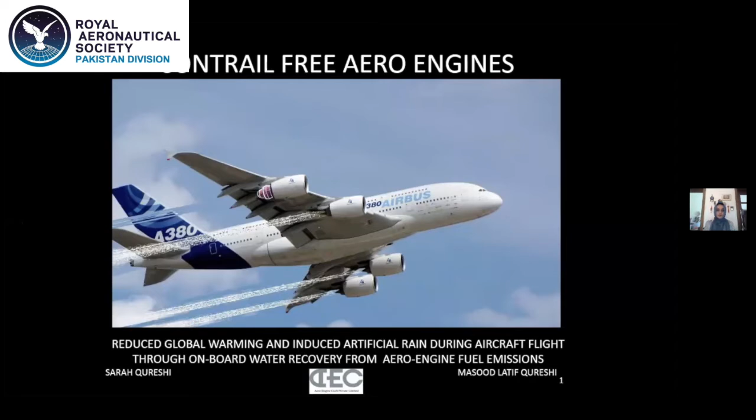We would be talking about contrails. Contrails is the most abundant non-carbon emission in the sky. On ground, when we talk about global warming and fuel burn, there is one major contributor to global warming, which is carbon dioxide, because the byproducts of any fuel consumption are carbon dioxide and water vapor. But on the ground, because you are at 1 atmosphere pressure, this water vapor recycles into liquid water and does not behave as a greenhouse gas. But when you are at a cruise altitude of 10,000 meters, the water vapor is just in the molecular form, and it is a greenhouse gas just as carbon dioxide is.

So this issue is very critical because number one, it is happening in the sky. It is not very visible as other components of pollution are visible on the ground. Number two, the sole contributor to this pollution in the sky due to non-carbon emissions is the aviation industry, and this is a very specialized industry, and you require a lot of technical expertise. It's very tech intensive to deal with this problem. So when we talk about emissions, we have to deal with 2 kinds of emissions.

So contrail is basically the frozen component of water vapor that is released during hydrocarbon fuel burn in the air. And this is something that we have all witnessed when we fly, that the aircraft releases these white thin clouds, which are contrails. So we have developed a technology to mitigate this, which is called the contrail-free aero engine. The contrail-free aero engine is like an integrated turbo machinery which is attached to the engine at the end, and which processes the emissions of the engine and converts the water vapor component into liquid water, retains it on the aircraft, and releases a cleaner exhaust in the atmosphere.

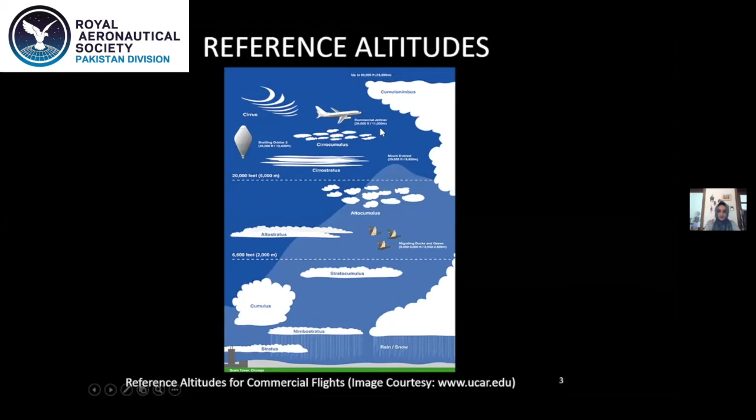And when we are cruising at an altitude of around 11,000 meters, we are even above Mount Everest. So at these ambient conditions of around 218 Kelvin temperature and a quarter of a bar atmosphere, there is no way that the water vapor can automatically recycle itself into liquid water. So this is a problem and it needs to be addressed.

So one of our contributions is that we have developed a turbo machinery. It's an invention by Sir Masood Qureshi. It is an attachment to an existing aircraft engine that can process the combustion gases, sift out the water vapor content as liquid water and store it on the aircraft. And then when you are flying lower down in the atmosphere, closer to the ground, before landing, you can release it as water vapor or rainfall.

So this work was given to me as a research question during my PhD, and since it had a lot of commercial promise and global impact, the university was very keen that this should be taken forward. So after my PhD, I came back to Pakistan and I set up Pakistan's first commercial engine and aircraft R&D company with my co-founder Masood Latif Qureshi. With this company, we are working on sustainable aviation and pro-environment aircraft engines, and on addressing sustainable development goals, the global goals of climate change, water scarcity, innovation.

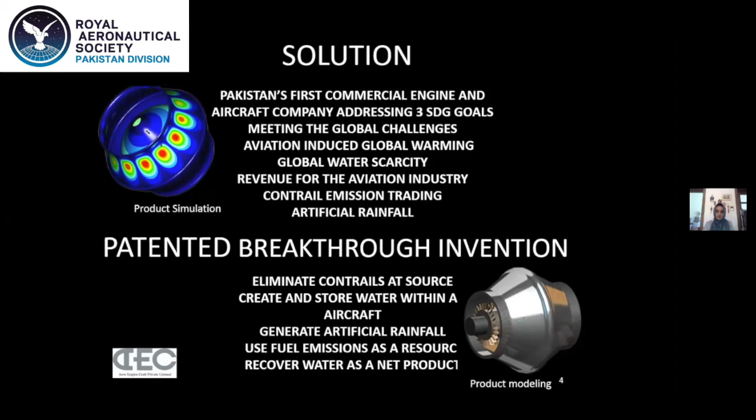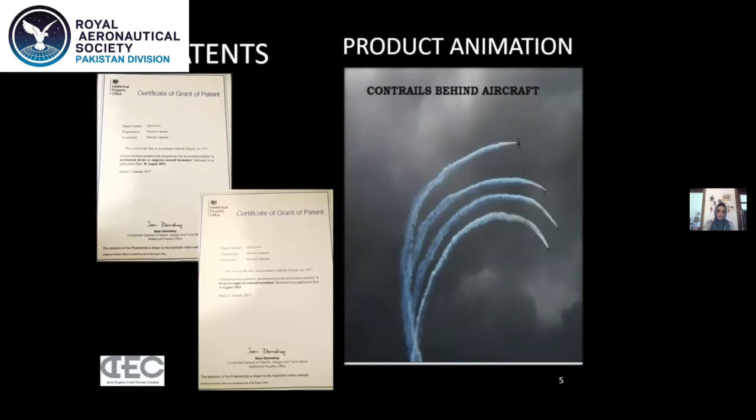Okay, these are the two technology patents that were granted within 15 months for this technology. And these are the milestones that we have achieved. As I mentioned, this was a problem stated during my PhD in 2012. And we moved through the invention and the scientific validation, through atmospheric physics, thermochemistry, mathematical modeling, and then the engineering model was developed. After that, the aircraft performance and engine performance analysis was simulated and carried out to analyze its impact.

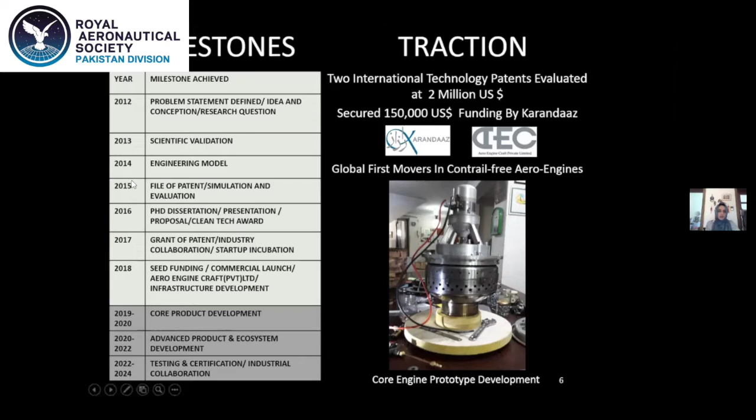And the patents were filed. So in 2016, I submitted my PhD on this, and this was initially done on the A380 because the A380 was the popular aircraft at that time, and it was the largest. The baseline specs were the Trent 900 series because the A380 engine was the largest engine at that time, and if you can verify or validate a model on a large scale, it is easier to scale down. So that was also one of the objectives of using the A380 baseline specs. In 2017, the patent was granted, and we launched our startup. We secured a modest amount of seed funding on equity sharing.

And started the core product development. So at present we have, alhamdulillah, completed the core product development. It is under the testing phase. Obviously there has been a delay because of COVID, but inshallah we would be moving on to the next phase soon. And then we hope that we would be developing the same product on a large scale, on a commercial transport engine scale, and then testing and getting it certified.

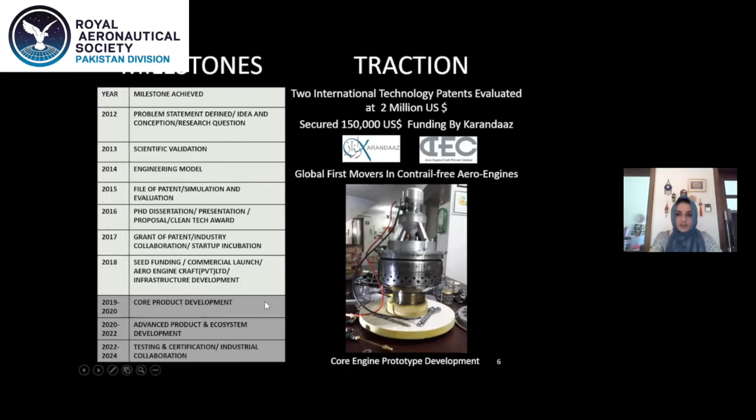So our patents are valued at US$2 million, and we can very proudly call ourselves global first movers in contrail-free aero engine design in the world. So this is basically just to explain where we stand in terms of technology.

All technology that has to get airborne is rated on the basis of NASA's technology readiness level. This is a very popular standard. It starts from 1, which is just a concept. At 2, you develop a mathematical model. At 3, you carry out simulations. Then you do component prototype testing in the lab, then system testing in the lab, then testing in air and flying missions, and then you are ready for a commercial launch at TRL9.

So TRL1 to TRL3 is usually what PhD research is all about, and this is what I covered during my PhD. When we launched our company, we started at TRL4. We decided to develop a proof of concept small scale model, a 1 kilonewton baseline thrust jet engine, integrated with the turbomachinery, that could later be scaled up.

So we started making components. Every component was individually tested for the jet engine, the assembly of the jet engine was tested, and then the turbomachinery for the contrail-free device was developed, and we tested one version. Some issues were highlighted, and now we have developed a second version that is inshallah going to be tested soon. So at present we are at TRL6.

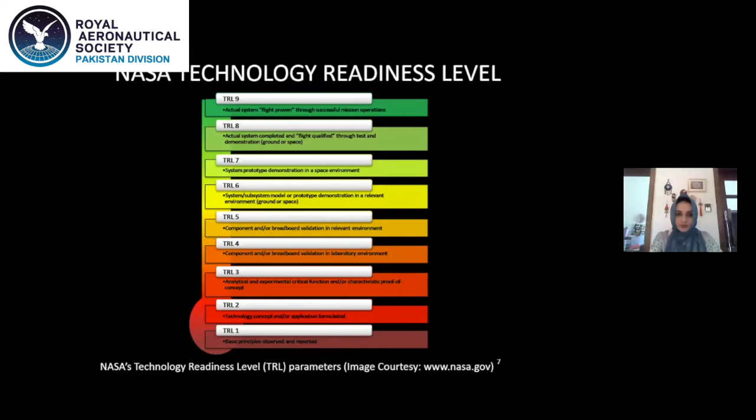So I'm going to give you some business perspective first, and then a bit of a technical concept perspective. The aerospace R&D industry is just like any other R&D industry. It is very technology intensive, and the way we budget ourselves is that almost 40% of our budget goes into equipment, machinery and materials. The remaining 40% goes into human resource, because human resource is very specialized, and overheads are the remaining 20%.

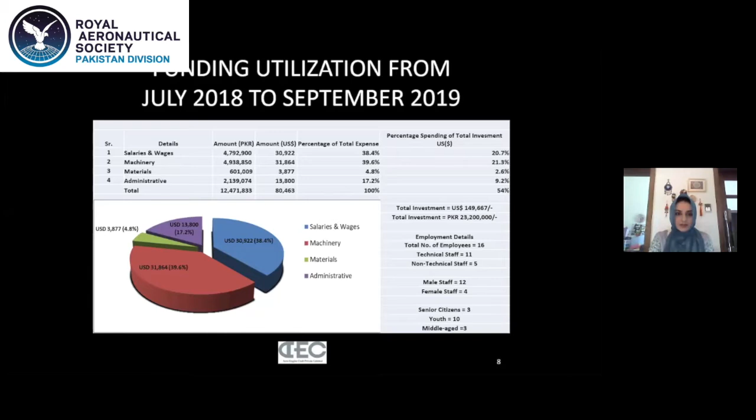Talking about the market, we all know that commercial aerospace is very monopolized and very controlled. There are only three manufacturers of commercial transport engines: Rolls-Royce, GE Aviation, and Pratt and Whitney. Rolls-Royce has 25% of the market share. GE has 55%. There are around 55,000 commercial long-haul flight engines in service, and the pre-COVID growth rate was 3.4%. So this is our primary market where we aim to sell this product.

Our secondary market is the airframe manufacturers, because the contrail-free aero engine would need to be integrated with the airframe for the storage of the water that is created. So the secondary market is Boeing and Airbus, and pre-COVID we had around 25,000 commercial transport aircraft flying in the air.

Then we have other stakeholders as well, the environmental agencies: the Intergovernmental Panel on Climate Change, the United Nations Framework Convention on Climate Change, ICAO, EASA, and we have COP26 coming up. Unfortunately, this is a responsibility that the entire aviation industry holds. Because this contribution to global warming in the sky is not very visible, and it's so specialized, the rest of the world is not addressing it. The aviation industry itself needs to address it, and make sure it is included in the agenda of the international climate change bodies for mitigating global warming and climate change.

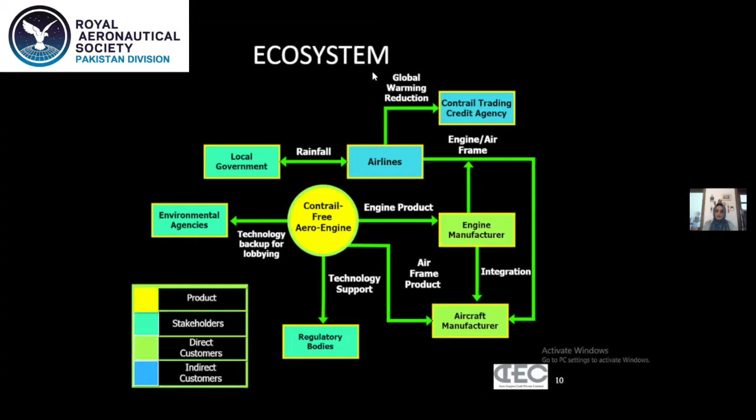Because if they say that, okay, we should not have contrails, but there's no solution, nobody can stop flying. So when the technology provides an alternate solution, then that is when the regulatory bodies feel confident to pass their regulations.

Okay, so we are very actively seeking immediate investment of 1 million US dollars to promote this technology to the next level. We are almost done with our first phase of making the prototype technology demonstrator. And then in the second phase, we need to develop the industrial version, which is another 2 years, and then another 2 years for product testing and certification.

So now the business model is basically based on a patent licensing model, where we license out our technology to the OEMs, and they can then sell it, and they give us a licensing fee for every product that is sold. So basically, the benchmark for patent licensing is 3% of revenue. So we sell a product to the engine manufacturers, and when they sell it ahead, whatever revenue they generate, they have to give us 3% of that, and that would be the revenue earned by Aero Engine Craft.

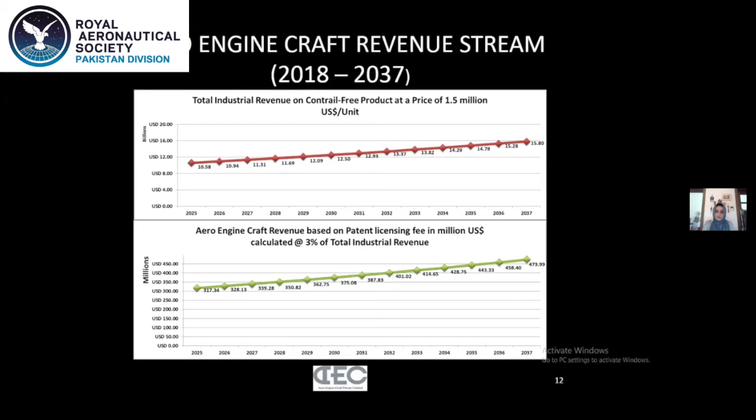So this is extrapolated on the annual engine growth of 3.4%. And I think this is conservative, because post COVID, there would be a boom, and I think aircraft travel would suddenly expand, and the growth rate might be higher.

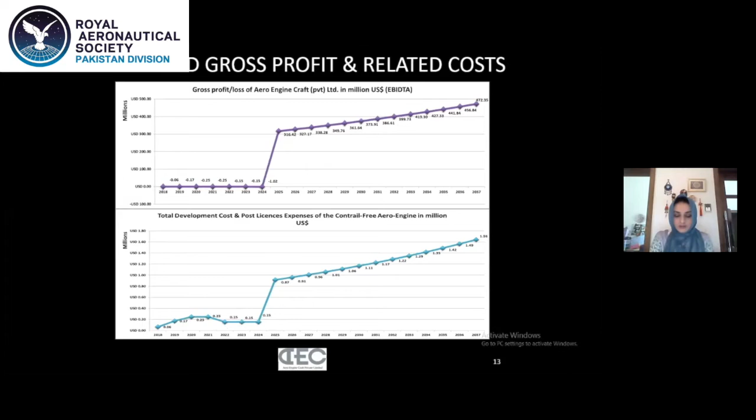So this is just giving a profit and loss and development cost that we have. So initially, there's a development cost of developing the technology, and then later there would be just the administrative cost of selling the product, and this investment would be recovered in the initial years of the commercial launch of the product.

So I'm going to touch briefly on the technology, because a lot of people are from the aviation industry, and they have a lot of questions regarding the technological aspect. So basically, this is a turbo machinery. It's like an addition to the family of gas turbine components. We call it the expeller, and basically the purpose is that the turbo machinery condenses the water vapor into liquid water within itself, contains that liquid water, separates it out, and stores it on the aircraft during flight.

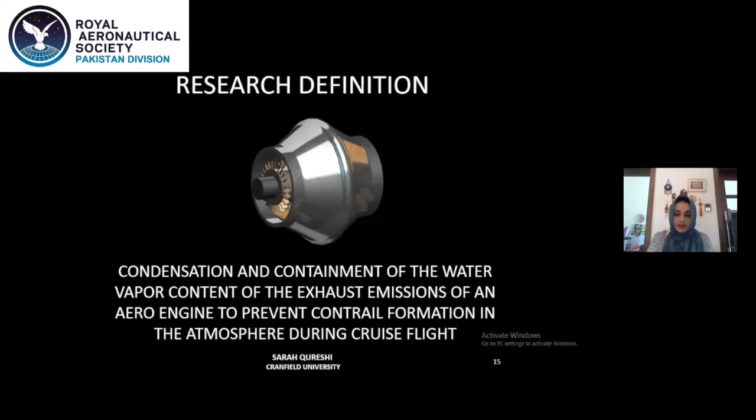Okay, so the research strategy was basically, this is just how this work started. It's a very long journey, and we know that aviation timelines are generally very long. We have planes flying in the air that were designed 20 years ago. We have the Mirage in service at present in Pakistan, which is more than 50 years old.

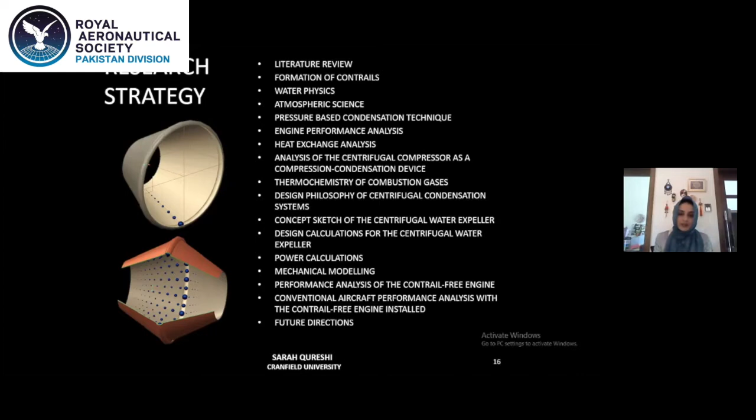So this started with a basic study of contrails and water physics, atmospheric science, and condensation techniques. And once a technique was developed, it was simulated to determine how it would affect the performance of the aircraft engine. And then we looked at different things like a simple conventional heat exchange analysis, as well as using centrifugal compressors, the chemistry of emissions. And with all this, we came up with the design philosophy of this condensation system, and we developed the engineering model, and then this was simulated on an A380 aircraft on Trent 900 baseline specs, and the analysis was carried out.

So this is something I just want to explain. This is very important. It's something people don't understand, how contrails are formed. So basically, they are developed on the basis of the Kelvin equation, which is a function of the size, the ambient temperature, ambient pressure, and the saturated vapor pressure of water at that ambient temperature and pressure. And this determines the size of the water vapor or condensate that is formed.

So if the size of the water particle formed is around 0.01 micron, this order, then it forms a cloud condensation nucleus. And so it is just a nucleus where all the other natural clouds would come and coalesce around it to form a bigger cloud.

If it is in the order of 10 microns, it would form a water vapor or a cloud, and if it is 100 microns, it would form raindrops. So if you look at this graph, this is our altitude from zero above sea level to 11,000 meters above sea level. And the particle radius that is formed is in the order of 0.7 microns, right? So this is something like a cloud. It is still under 10 microns, so a cloud is formed. Water is not formed, right?

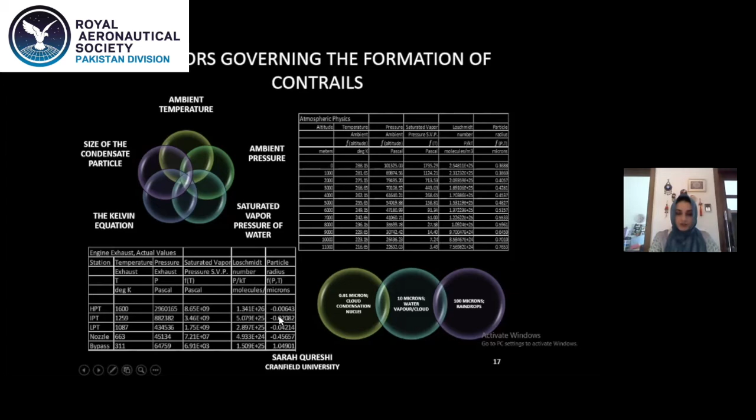And only in the bypass, because bypass has no combustion, just the exhaust air is entering, the molecule size is 1 micron, which is again a cloud. So from here we understand that the atmosphere here is very hot. We don't even have clouds, we have steam here.

Okay, so talking about contrail prevention, in the world there are two distinct methods. Either you disperse contrail into a vapor: contrail is in the order of 10 microns, so you make it smaller than 10 microns, into 0.12 microns, so it does not remain a contrail. But the issue here is that even if it does not remain a contrail, it would still be a cloud condensation nucleus, and it would still be a greenhouse gas in molecular form. So as a greenhouse gas, even if water vapor does not manifest itself as a contrail or an artificial cloud, it still contributes to global warming.

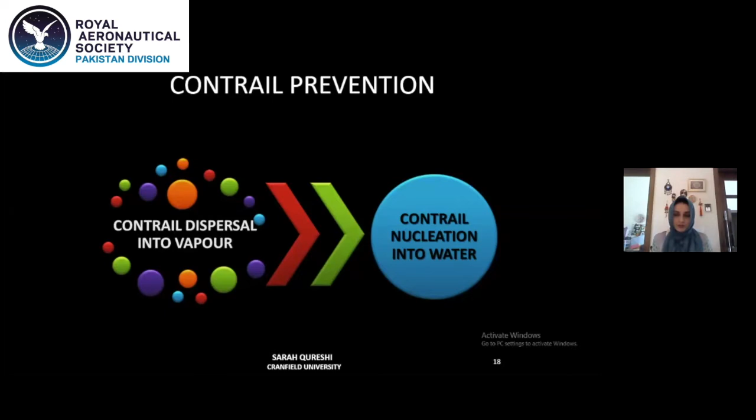And then we have contrail nucleation into water, where you coalesce the smaller particles of water, and they form a larger particle, which is liquid water. So we started this by a performance analysis on a three-spool engine, both an intercooled recuperated turbofan engine as well as a regular standard turbofan engine, just to know whether one of them would be more efficient.

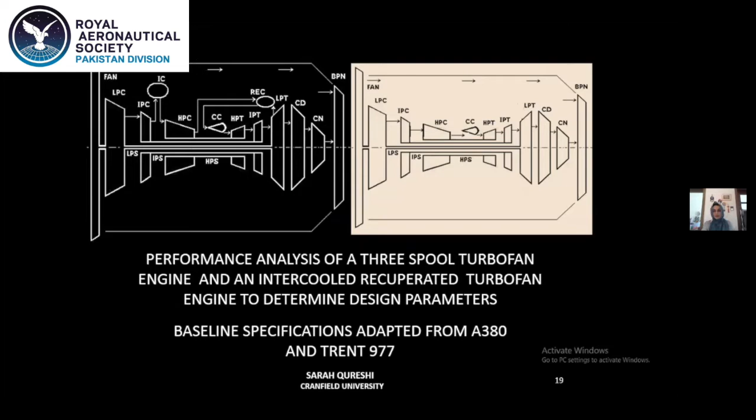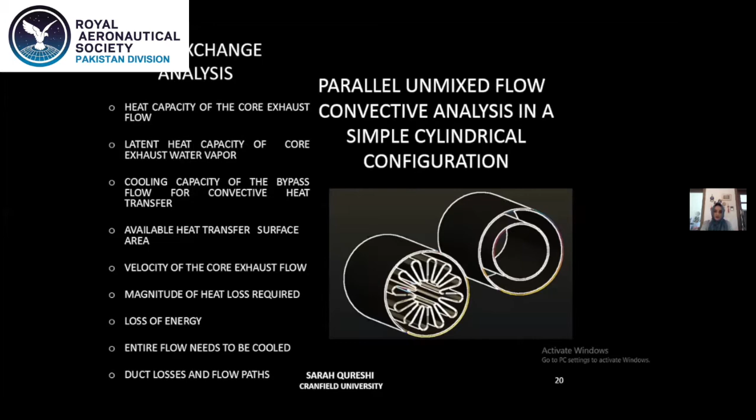Initially we also did a simple heat exchange analysis, and the calculations showed that if you try to condense this water using a traditional heat exchange method like heat exchangers, you would need a heat exchanger the size and weight of an engine itself to condense this water. So this is essentially carrying another engine on the same aircraft. So then we have the other techniques. All these techniques are basically research-based techniques.

Initially, the work on contrail-free aero engines started after World War II, because enemy planes could be detected by this white smoke coming out of the aircraft. So they started to look at ways in which the formation of contrails could be avoided, either by changing the flight conditions or by using chemical additives. But chemical additives don't solve our problem, because they just disperse the water vapor into smaller particles that are a greenhouse gas, and they in themselves are chemical pollutants in the atmosphere. Then I mentioned the heat exchange method, which is not airworthy in terms of its size and weight.

And then there have been other research techniques: dispersion through microwave heating of contrails, or ultrasonic excitation. Like the very famous method of using silver iodide to seed moisture and create rainfall, so something to seed vapors and clouds into ice. That was one research technique. And then trajectory optimization is like flying lower or flying higher in the atmosphere. And what we are using is pressure-based condensation.

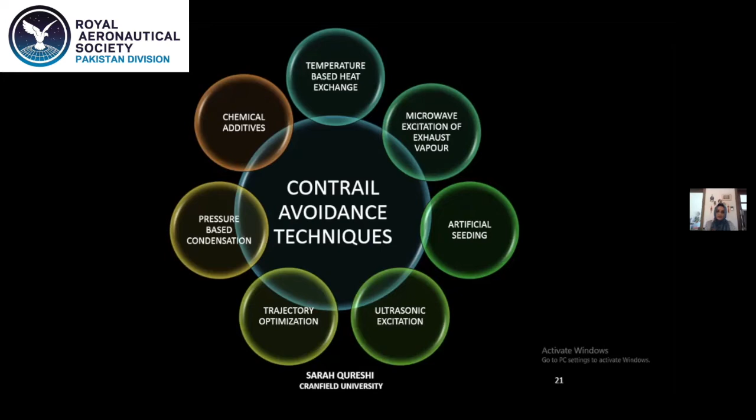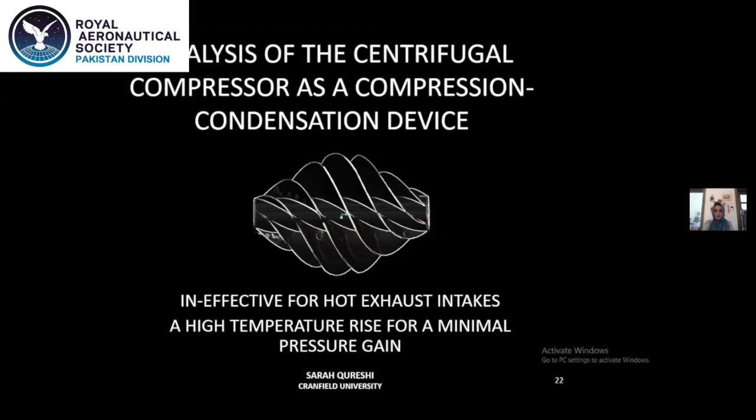For pressure-based condensation, initially we also tried to use the centrifugal compressor as a compression device, but it is designed for intake air at low temperatures, not for high temperature combustion gas. So we developed this pressure-based condensation method to condense the water vapor, and this is basically the green exhaust concept. First of all, it is a modular add-on attachment. We all know that all gas turbine engines in the aviation industry are now modular, because they are leased on power by the hour, or they have different life.

So instead of replacing the entire engine, one module like the compressor or the turbine is replaced. Similarly, our design is also modular, and it can be fitted on an existing aero engine behind the low pressure turbine, in between the low pressure turbine and the core nozzle. It can contain water vapor inside the engine.

Importantly, once you separate out the water, because it is 2% by mass flow, it is easier to further cool that water, instead of using conventional engines where you have to cool down the entire gas, which is very challenging. This water can then be used on board aircraft for de-icing, or released at lower altitudes.

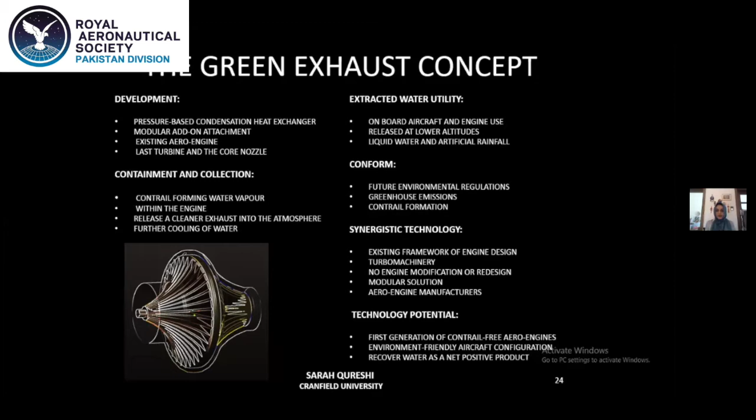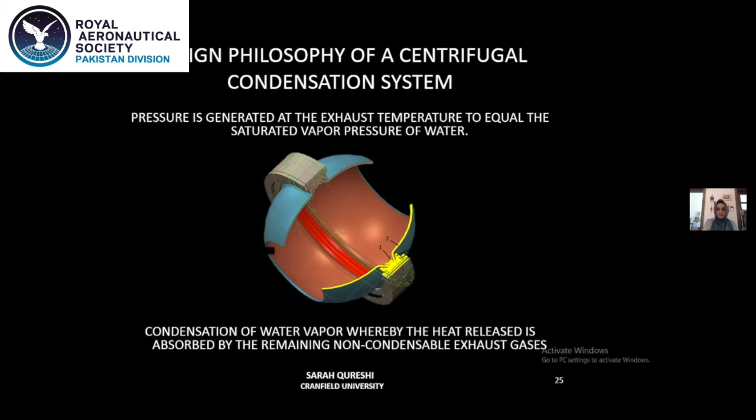So this is the design philosophy of condensation: you generate a pressure at the exhaust temperature which is equal to the saturated vapor pressure of water, so that the water vapor condenses. We also studied the thermochemistry of the gases, where there is an intergaseous exchange of energy, because water vapor has to lose its latent heat during condensation.

The other two gases among the combustion gases are carbon dioxide and nitrogen, and we found out that they act as a heat sink, absorbing the latent heat of energy. There are several energy transitions within carbon dioxide and nitrogen as well, which also enable carbon dioxide to reduce its infrared radiations that contribute to global warming.

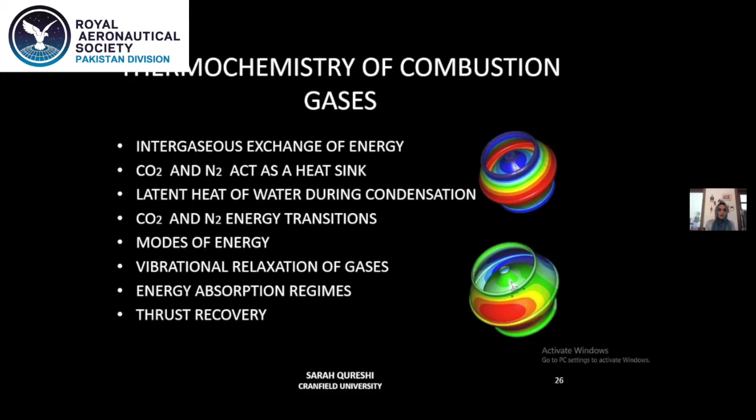So this theory is based on the vortex energy equation. We went through a thermodynamic analysis, a structural analysis, stator and rotor blade design for the turbo machinery, the shell design and sealing, and the engineering model was developed.

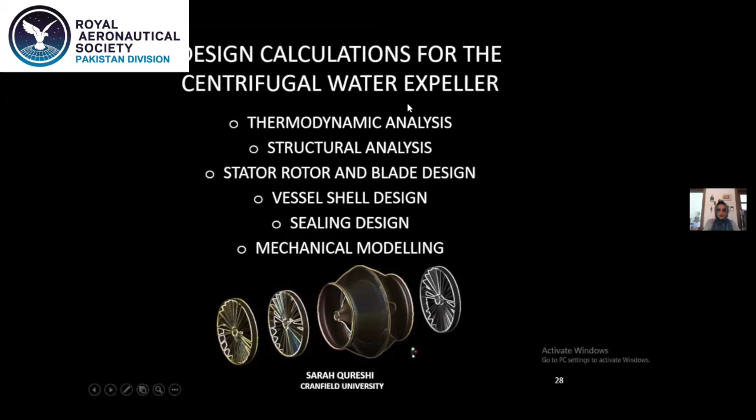So this is just different stages of engine simulation, with some design point runs and off-design runs. Basically, first we do design point, we determine the takeoff rating of the aircraft. That is our design point, because that is where you need maximum thrust out of the engine, so you have to design for that.

All other segments of flight are off-design conditions, like climbing, cruising, or descent. So first we determined the design point, and then off-design runs were carried out, and you determine the thrust requirement at cruise.

Then there were different techniques where this engine was integrated, and again the takeoff rating was determined. Because this device is not active at takeoff, the takeoff rating does not change. Whatever compensation or trade-offs were determined during cruise flight.

Again, the aircraft simulation was carried out just to determine that there is maybe a 20% or 30% increase in the engine weight and engine length, and how that would affect the aircraft. But overall, it is a very minimal portion of the overall weight of the aircraft, and because it is aligned with the core geometry of the engine, the aerodynamic performance of the aircraft is not affected.

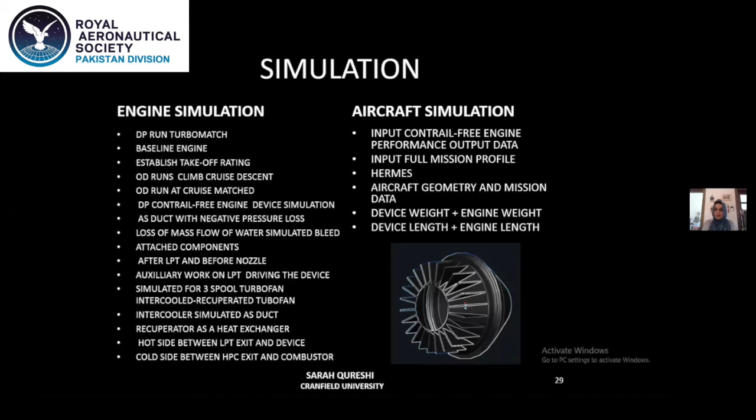The emission index of water for hydrocarbon fuel burn, or kerosene jet fuel, is 1.25. So for 1 kilogram of fuel, we release 1.25 kilogram of water vapor.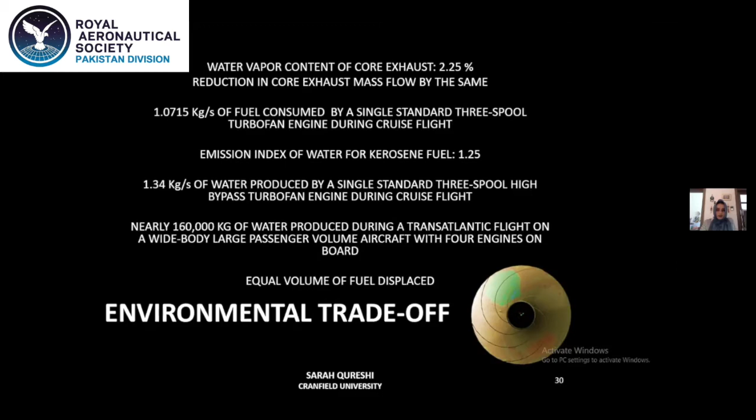So basically, our outcome is that we prevent contrail formation and reduce the global warming that is created through the contrail, and in the process obtain water.

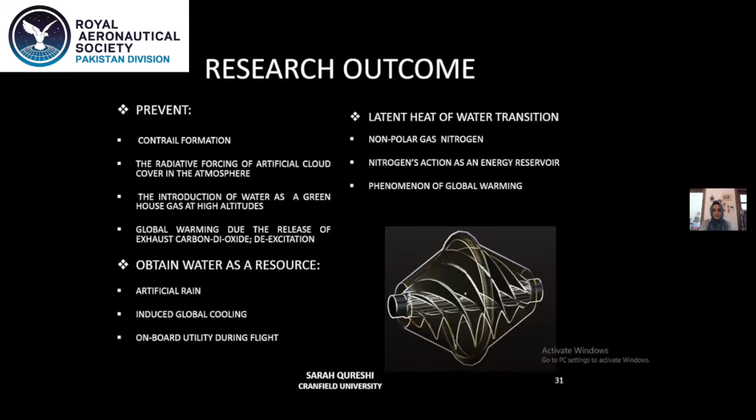This was basically carried out with a multidisciplinary approach. We had to study atmospheric physics, thermochemistry, engineering thermodynamics, aircraft performance, and engine performance. This device is like an art-to-part project.

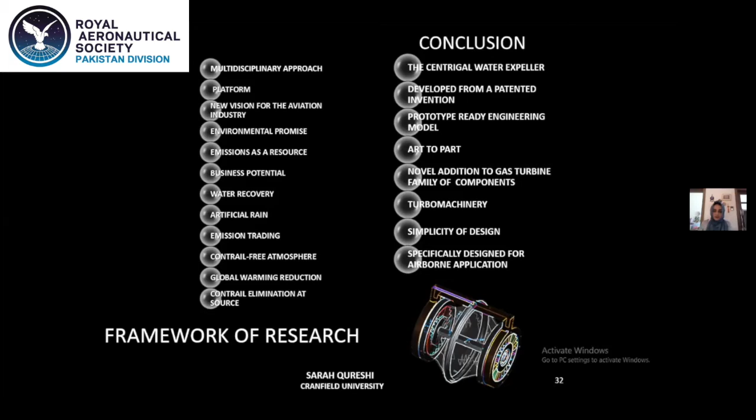It was just a concept on a paper, which was then developed and patented. The idea and the mechanical functioning was patented, and then the entire analysis was carried out, the mechanical model was made, and now we have developed the actual engine prototype.

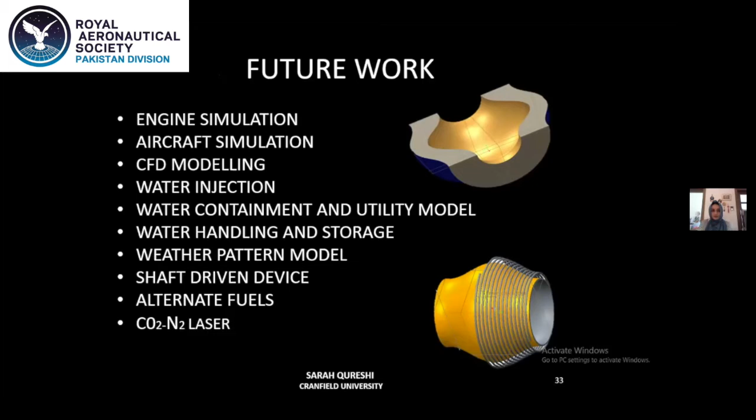Still, there's always room for research. I have a visiting academic position at Cranfield University, where some students, for their master's thesis, pick one topic and carry out research on different aspects to improve them further.

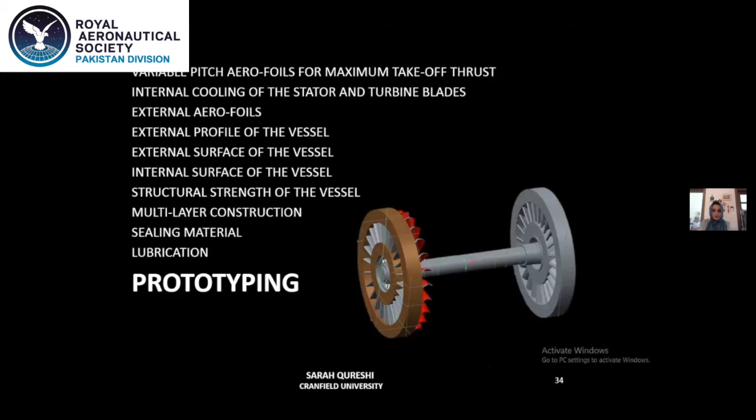Karandaaz provided us equity basis, some seed investment, although that's not exactly what somebody would look at as an investment in the aviation industry, because they had this women's program supporting women who make clothes and handbags. But it helped us launch our company and develop the prototype. We've also been trying to get collaboration with the Pakistan Aeronautical Complex, as they have a lot of facilities available and are close to our working site. At Cranfield, I have a visiting academic position, so the academic side of R&D keeps moving ahead through that platform.

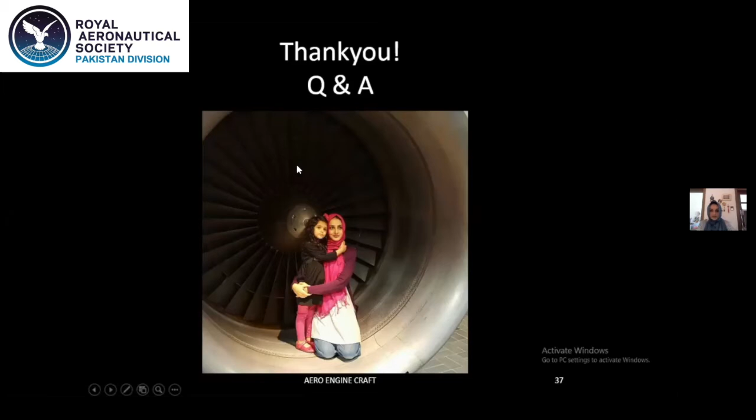So this is basically the end of the presentation. Now, can you hear me well? The internet connection is not very strong, so if you can't hear me, please type a message. I'm going to run this now, this is something about our company and our work. Is the video clear?

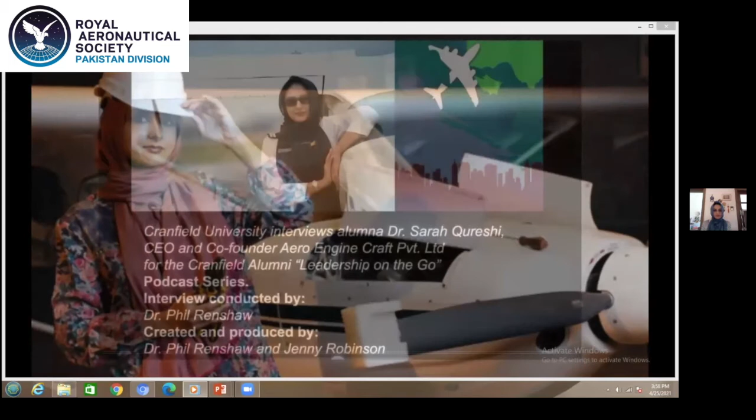The technology in itself is very challenging. When you talk about radical or disruptive technologies, they're not very well received. It's very difficult to convince people to look at it from a different perspective. I see a lot of activists focused on climate change on the ground, but I think we all need to look up into the sky. It has its repercussions on the earth, and it is the earth's atmosphere that is at risk. They're both greenhouse gases.

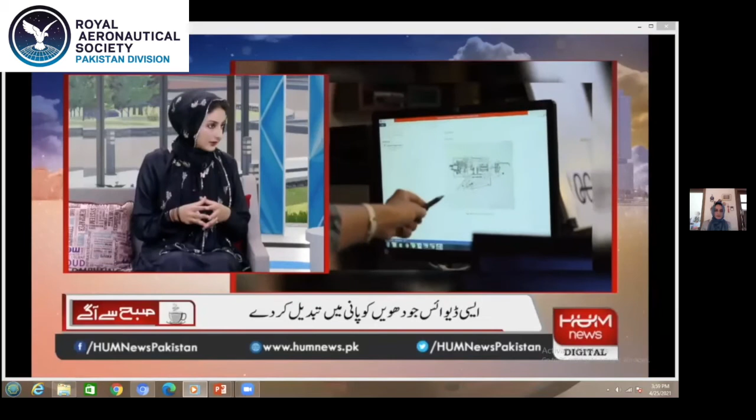If, for example, they say no contrails from tomorrow, that's not a solution. Nobody can stop flying, planes have to fly. So there has to be an alternate or backup technology that says yes, we have a solution to this problem. And if there's a regulation that makes the aviation industry comply to these standards, we would be supporting that.

I'm Dr. Sarah Qureshi, CEO and co-founder of Aero Engine Craft Private Limited. We are developing the next generation of environmentally safe aircraft engines for the world. My observation and suggestion to you will be in the context of climate change as well as regulations. I believe that at present, globally, all regulations and efforts toward climate change are focused on the ground, and unfortunately we're neglecting the Earth's atmosphere, which is an even bigger threat to climate change than the ground, because there are no offsets in the atmosphere. You cannot grow trees, and there's a limitation to the kind of technologies that could be transposed in the air. So climate change due to aviation in the atmosphere is a looming threat. So far, since the aviation industry is so monopolized and controlled, we really don't have any regulation by any international bodies on climate change, including the UN. So I would request you to look deeper into this matter, and it has to be done urgently. Thank you, thank you very much.

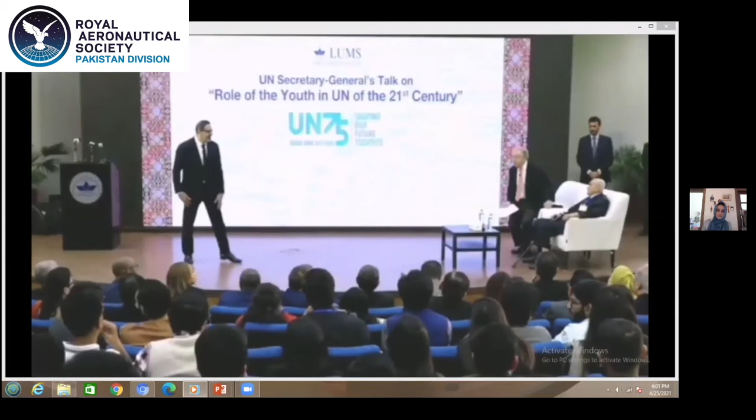Okay, so over to you, sir. Well, I want to thank this last intervention, because it was the only one that really gave a suggestion, and a very valid one.

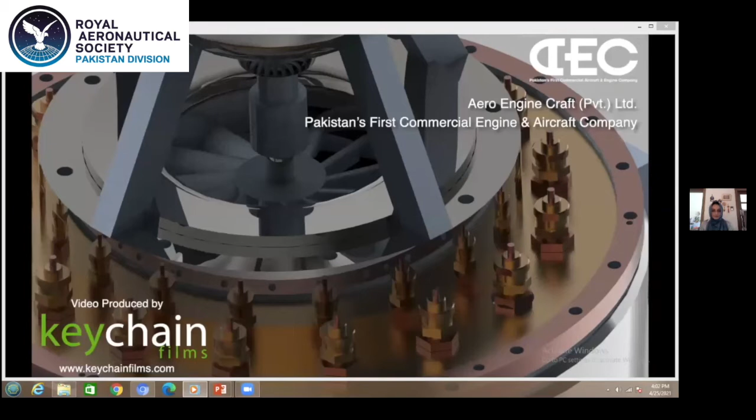Okay. And then this was a long video, but if I can find it, I just want to show you a project concept animation. This is just 30 seconds, and there's no music with this.

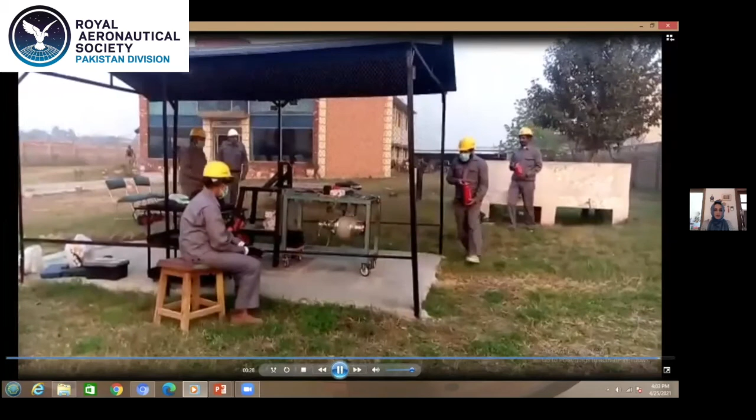Okay. So this is it. You can see that we are trying to work on both fronts. We are working on the technology development, and that too, we are trying to develop capabilities from scratch and build it up. It's not like a turnkey solution being imported from China.

The engine that we developed is almost 95% in-house components. Even 90% of the engine is manufactured within our own facilities. And secondly, we are also trying to promote this concept of sustainable aviation technologies on the global front, with regulatory bodies, and trying to create awareness around that.

We have a question from Fayed Ishtiyaq. Assalamualaikum. My question is that most of the airlines look at the lifespan of the particular devices. So what is the projected lifespan we can expect from this device?

You have to go through very rigorous fatigue analysis and life cycle assessments of the device. But as I mentioned, this is turbomachinery, closer to a turbine because it is processing hot gas and hot emissions, and you would need the same materials; maybe the rotation speed is different. The technology is very synergistic, so it would be very close to the life cycle of a low pressure turbine.